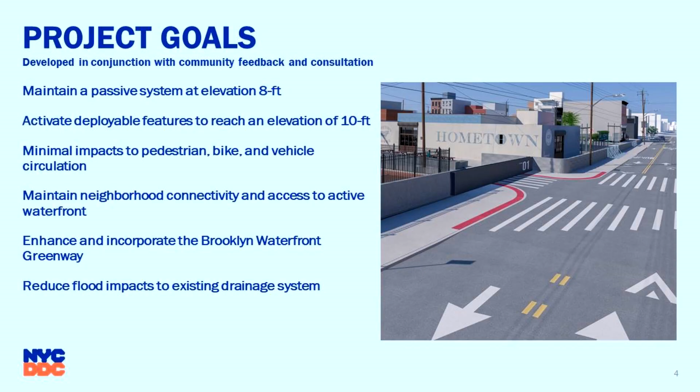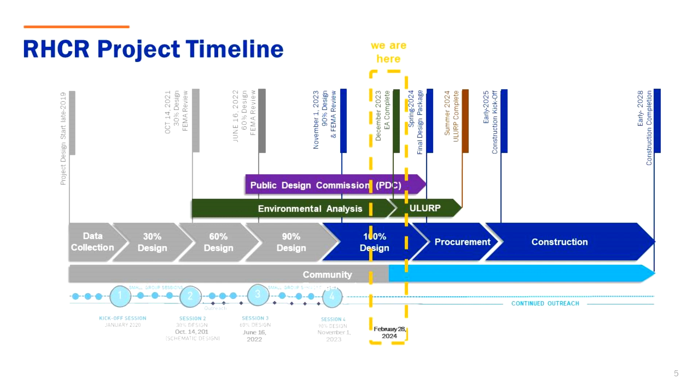So here is the schedule from top to bottom. PDC review and approval will be coordinated as we finalize design, and we're aiming for this spring. The public review of the EA is complete, and FEMA will address the comments received during the comment period. We are now in the ULURP process, which is what brings us here today, running through August of this year. Design completion is imminent, with about 100% design draft review beginning at the end of next month, or March. Community engagement has been and will continue to be a critical component of this entire process.

Now we'll take a look and review what we've heard recently about the project throughout design. This is a general overview of the community and stakeholder engagement to date for the project through design. Here are some questions and comments we've heard along the way; we'll be brief and hit some of the highlights.

There were concerns about the level of flood protection. Our design team went back to the drawing boards and developed a new flood protection system that protects the community to 99.9% of all historical storms at elevation 10. Public transportation requests helped inform improvements to the BWG, an alternative form of transportation. We ensured that flood protection is not just a stark wall, which was addressed in the design by incorporating elements like raising street grades, which act as a line of flood protection. Other comments about the BWG were addressed, and we also heard suggestions about specific sites in the area, but those are simply beyond the specific scope, aim, and goals of this project.

At 30% design, we heard the following regarding the alignment of flood protection, leaving some areas unprotected. A study was conducted to consider alternative alignments, but given the requirements of the FEMA grant, it was deemed infeasible to build flood protection elements outside of the city's right-of-way.

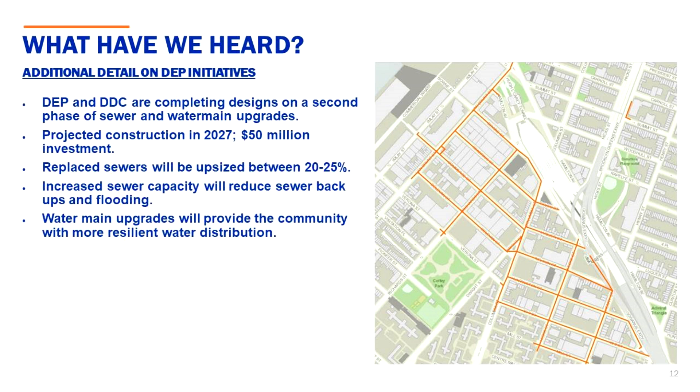Thank you, Eric. So I'm going to walk you through just 3 sections of the project. We're going to talk a little bit about existing conditions. We'll walk through the actual elements of the flood protection system, and then we'll talk a little bit about ULURP, what we're really here to focus on today.

All right, so just a little bit high level of the flood protection system. The system is made up of two independent systems.

The first system is the one we just highlighted along Atlantic Avenue. And the second system is along Beard Street at the bottom of your screen, which we have highlighted now.

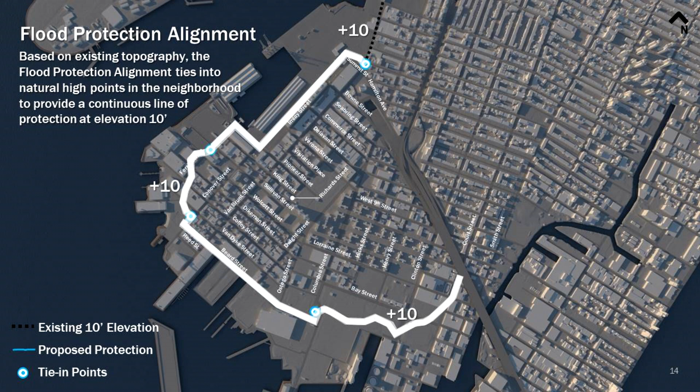Between those two systems there's an area where the existing grades are above elevation 10 currently, and the same thing happens on the east side of the project area. When all these pieces are linked together, you get a flood protection system that surrounds the entire neighborhood to elevation 10. That system is made up of both passive and active components, which we'll see in a second.

A little bit more about the existing conditions of the neighborhood. Generally, Red Hook is characterized by an industrial waterfront and has a residential core, with a band of mixed-use area between those two. The largest land ownership in Red Hook is actually by the Housing Authority, and about 70% of the residents of Red Hook live in the Red Hook houses.

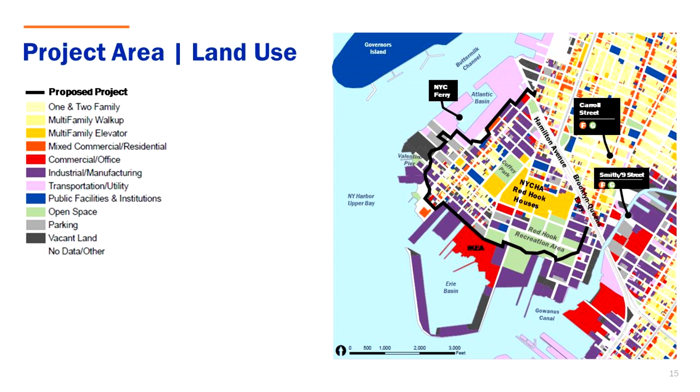There are a couple of notable exceptions to the general land use of the area. There is IKEA, which is along the waterfront, differing from the general industrial and manufacturing use there. It's also key to note that most of the waterfront, with a couple of key exceptions, is all private, so there's very little public area along it. That played a big part in our actual design alignments for the protection system. As Eric noted, everything had to be within the public right-of-way, and flood protection systems along the waterfront would not be.

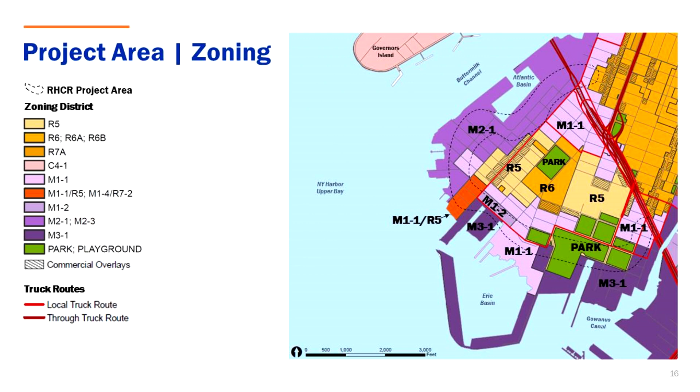A little bit more about the zoning of the area. You have manufacturing zones along the outside of the neighborhood, and the interior core, which is more residential. You'll notice also that there are truck routes that wrap through the neighborhood, noted by the dark red lines on the map. Those truck routes run down Van Brunt Street and around Beard Street, then out towards the east side of the properties.

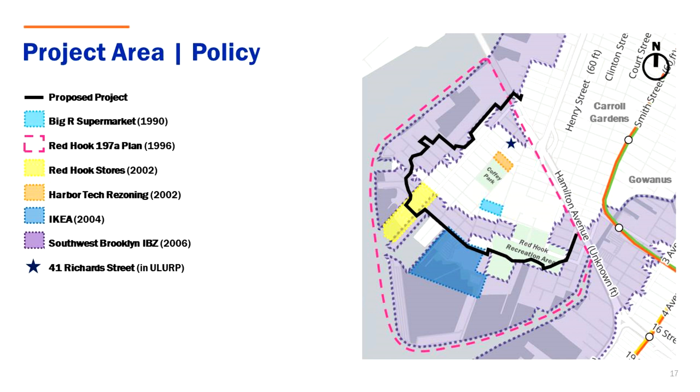Following the 197A plan, the Red Hook stores area was rezoned and remapped in 2002, and there was an additional rezoning for IKEA in 2004. The majority of the proposed project is located within the Southwest Brooklyn Industrial Business Zone, IBZ, which was established in 2006. The IBZ spans Red Hook's industrial waterfront and extends north to the Columbia Waterfront District and south to Sunset Park.

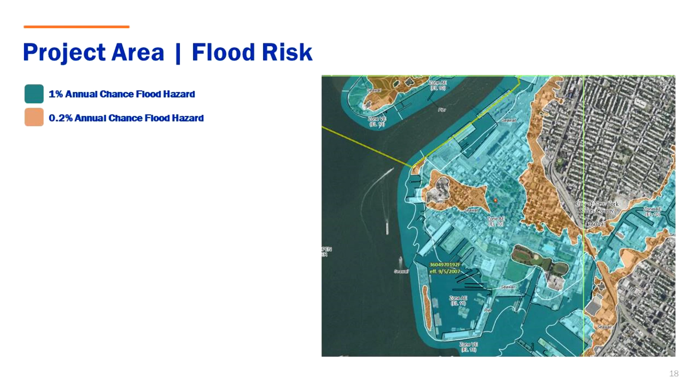You also note a couple of areas in orange here, which we talked about a few minutes ago. Those are the areas that are 10 feet and higher in elevation, the 500-year flood zones. That's what we use to tie our flood protection system into. So the natural topography really helped out with the flood protection system.

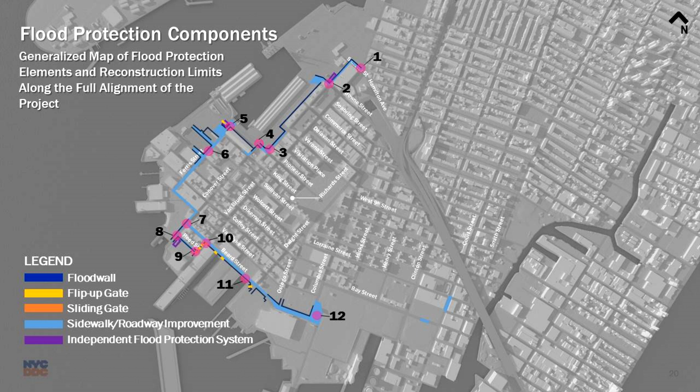All right, talking a little bit about the actual flood protection system itself. With an understanding of the difference between height and elevation, we are proposing a wall at an elevation of 10. But the highest wall within the neighborhood is about 4 feet high when measured off the sidewalk, so an elevation of 10 does not mean a wall that is 10 feet high.

The light blue throughout the corridor are streets that are being reconstructed and regraded. Some of these areas are being raised and others regraded to improve interior drainage. The dark blue line is the extent of the permanent concrete flood wall. The orange and yellow nodes are deployable gates that allow the system to achieve flood protection at a higher elevation, elevation 10. The purple areas are independent flood protection components around critical areas outside of the public right-of-way.

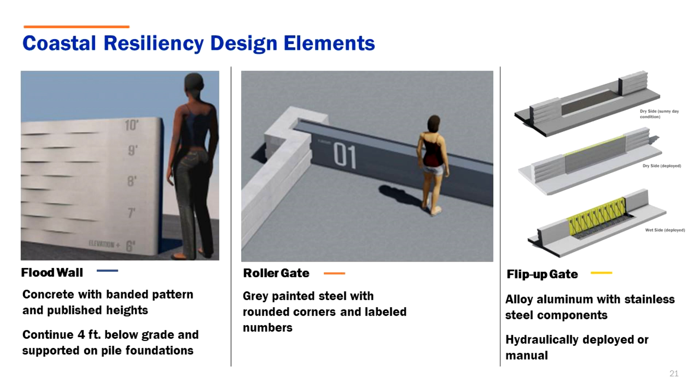And then finally, over on the right, you have flip-up gates, and those gates are flush with the sidewalk. You'll be able to walk in and out of the areas where those are located, and when required, they are flipped up into place. They also help complete the flood protection system at an elevation of 10. Without some of these movable components, we still have a flood protection system at elevation 8.

So a little bit now about environmental review and the land use actions, and kind of what we're here to talk about tonight. An EA was completed for this project following the FEMA format and meeting all the requirements of the city's CEQR and state SEQR system. A current final draft FEMA EA was published on FEMA's website in January of 2024.

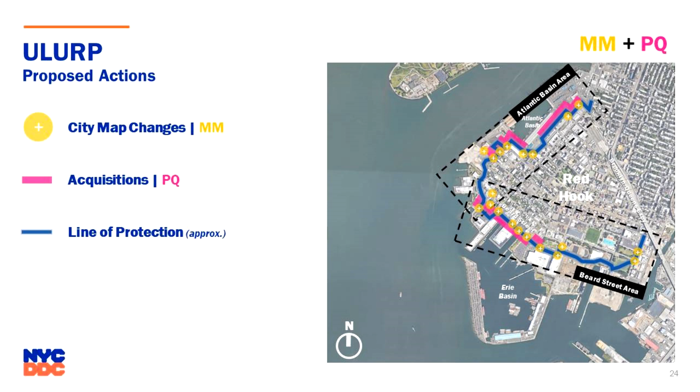The official review period kicked off with the public notice on January 26th, and the comment period will end 30 days after that publication, which was a few days ago on February 25th.

In addition to the EA process, which is separate from the ULURP process that we're here to talk about tonight, the EA is essentially complete now, and we've submitted our joint application to the Department of City Planning on behalf of the 4 city agencies for the ULURP process to start. That's the New York City Department of Design and Construction, Department of Transportation, Citywide Administrative Services, and Parks and Recreation.

That application is for changes to the city map and acquisitions to facilitate construction, operation, and maintenance of the Red Hook Coastal Resiliency Flood Protection System. This map is kind of an overview of all the actions. We're going to have a couple of maps here that break this down in a little more detail.

All right, so first thing we'll talk about is the street grade changes. There are a number of proposed changes in the existing city map highlighted on this plan in yellow. Changes to the legal street grades are noted here as well, and those are the circles that you see around the maps with the plus signs in the middle of them. And then we have actual changes to the map themselves.

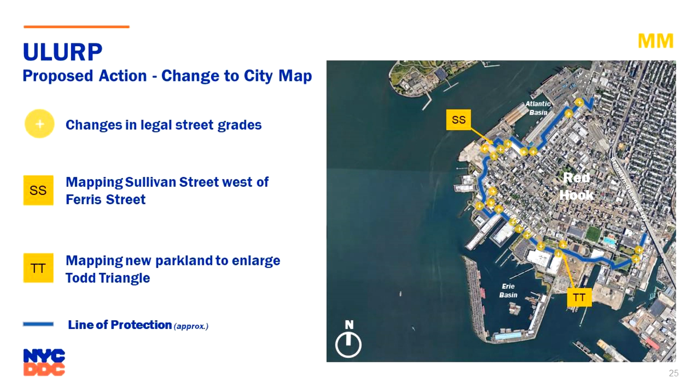So these are mapping exercises on Sullivan Street, west of Ferris Street. That's one that's identified as SS. And then you also have a mapping of the park land next to Todd Triangle, and that one is marked as TT.

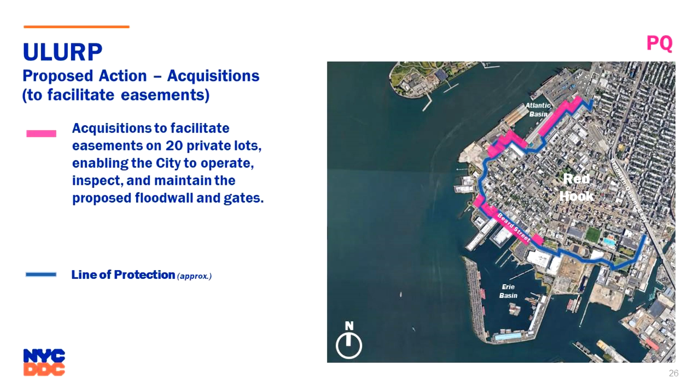So these actions here are the areas where we're facilitating the project by acquisition, or acquisition of easements, as it's identified here. To facilitate the easements, city planning refers to these as acquisitions. There are 20 private lots along the route where we need to acquire an easement, and those easements are generally for maintenance of the flood protection system, the gates, and the movable barriers. It's not real acquisition of property, it's acquisition of an easement to maintain and inspect that property in consideration of the FEMA requirements for the flood protection system.

This is a more detailed map of all the ULURP actions. We've broken this up, so this is the first half of the project, the Atlantic Basin area.

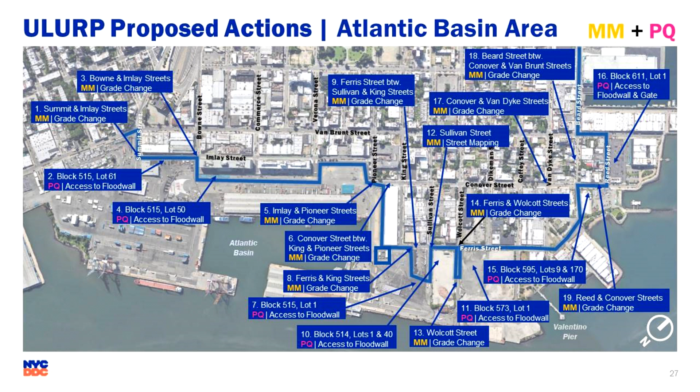If you don't get all this information now, these presentations will all be made available, so you'll be able to look through these things in detail. On this map, you're seeing both the map changes or grade changes to the map, as well

I'm going to back up one more time - the dark blue line that runs through all these maps is the generalized alignment of the flood protection system. It gives you an idea of where the flood protection system is and where those map changes or acquisitions are also required.

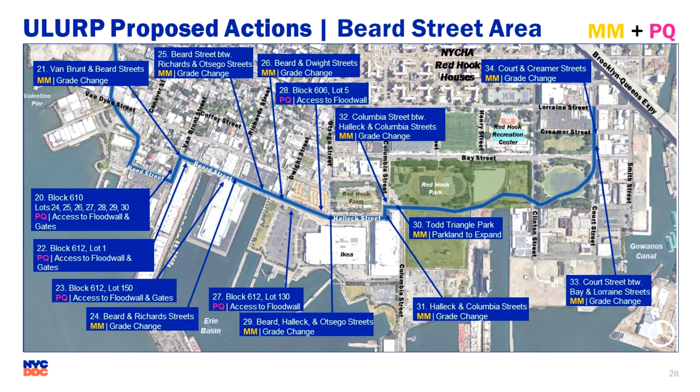Next steps in this process - this is more of a summary and next steps at the same time. We have this passive system at elevation 8 that we've developed, and with those active deployable features, the gates and the roller gates and the flip-up gates, we end up with a level of protection at elevation 10.

So the system of flood walls, raised street grades, deployable floodgates, and supporting infrastructure all work together with the existing topography at the high points that we noted at the beginning of this presentation, which allows us to minimize the built infrastructure and tie into the existing topography.

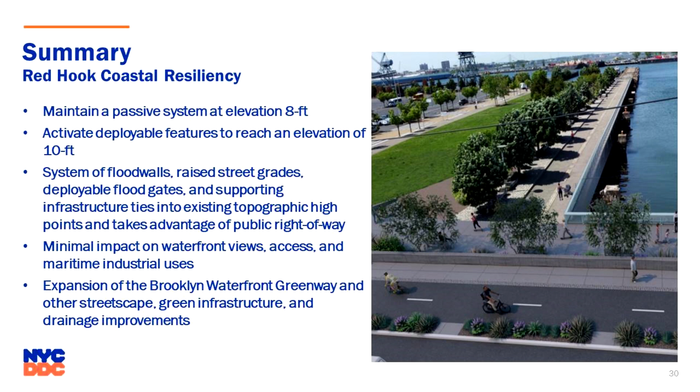The project also has a number of amenities associated with it, like the Brooklyn Waterfront Greenway, Todd Triangle, the incorporation of best management practices and green infrastructure throughout the route, and a number of other amenities as part of the overall project.

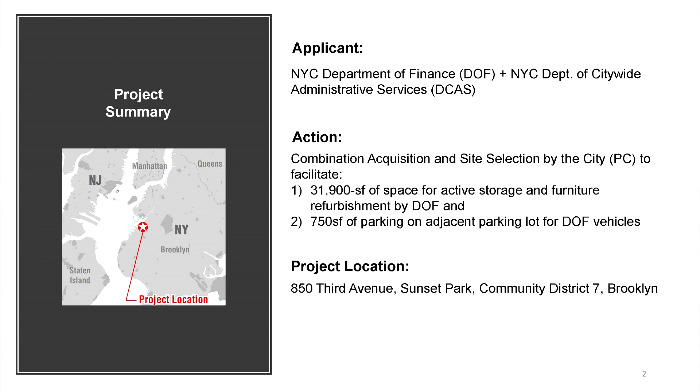This is an application for a site selection and acquisition action jointly sought by DOF and DCAS to facilitate approximately 31,900 square feet of space for DOF related to active storage and furniture refurbishment, as well as 750 square feet of space on the adjacent parking lot at 850 3rd Avenue in the Sunset Park neighborhood of Brooklyn, Community District 7. The project site is located at 850 3rd Avenue and is bounded by 2nd Avenue to the west, 3rd Avenue and the elevated Gowanus Expressway to the east, 30th Street to the north, and 32nd Street to the south.

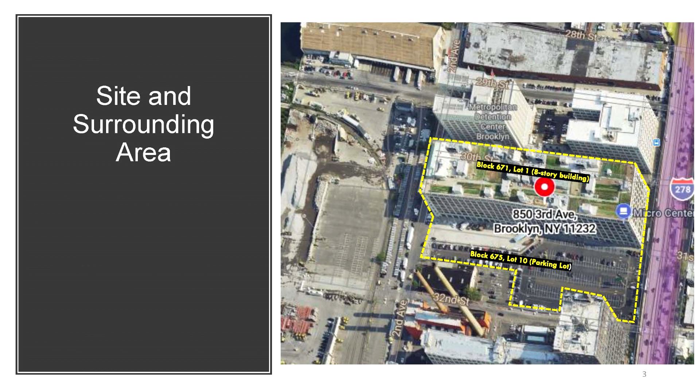Block 671, Lot 1 contains an 8-story building known as Liberty Brooklyn with approximately 1.13 million square feet of floor area, including light manufacturing, retail, and commercial office space uses. Block 673, Lot 10 contains the building's adjacent surface parking lot, which is used by visitors.

DOF records contain personal and confidential information that must be maintained in accordance with Internal Revenue Service, IRS, high security protocols. In 2014, IRS publication 1075 provided new regulations regarding the storage of sensitive information. As a result of these new regulations, it was imperative that DOF obtain secure file storage with 24-hour, 7-day-a-week self-service access for DOF employees. DOF currently maintains 2 operational storage facilities in the Sunset Park neighborhood of Brooklyn.

As part of the recent lease negotiations at the Industry City location, the landlord requested that DOF reduce its footprint, which led to the consolidation and relocation of storage space to the 5th floor of the 850 3rd Avenue site through the short-term license agreement currently in place. This application will permit the short-term license agreement at 850 3rd Avenue to become a long-term lease.

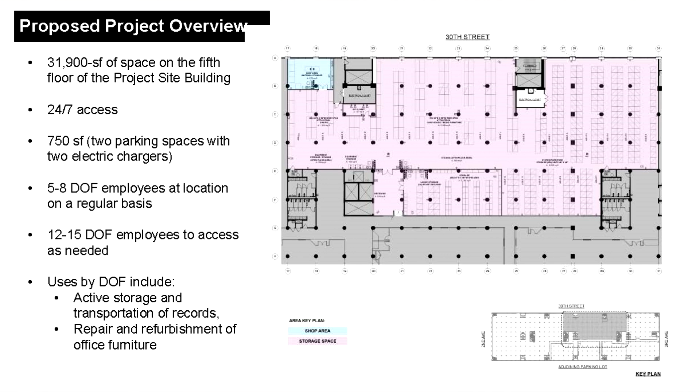The space would be accessible 24 hours a day, 7 days a week. However, typical hours of operation would be Monday through Friday during business hours, and no employees would be anticipated in the space on weekends. DOF employees would be permitted to use a dedicated loading dock and elevator to access the storage space.

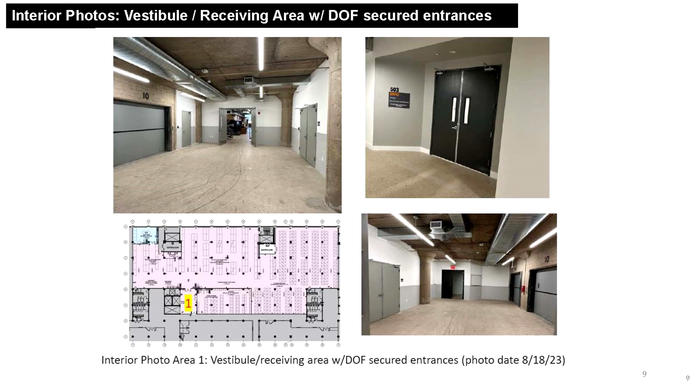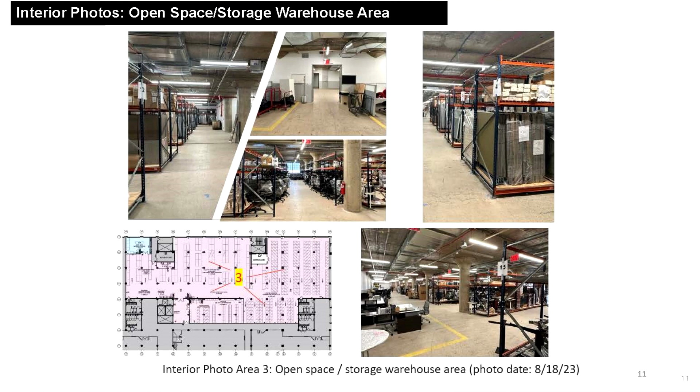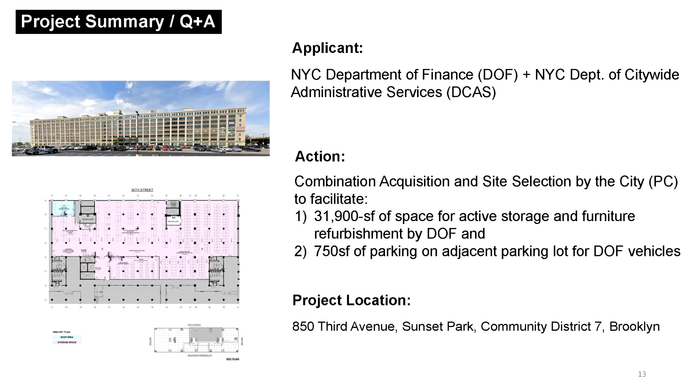What other sites were evaluated for locating this facility? I'll turn that over to John.

I'm John Kosa, Director of Leasing at DCAS. I've been involved in this project, not from the beginning, because it's gone on for quite a few years, but I'm involved now. The project was started in a pre-COVID, much different real estate market. We looked at a number of sites. We hired a tenant rep, Cushman & Wakefield, to do a site survey. We've looked at at least 6 or 8 sites, which I can list here: 4312 2nd Avenue in Brooklyn, 3913 2nd Avenue in Brooklyn, 105 Evergreen Avenue Brooklyn, 1450 3rd Street Brooklyn, 6626 Metropolitan Avenue in Queens, and 3353 Flatbush. There may have been a couple of other sites. So there we go, thank you.

And I know you mentioned this briefly in the presentation, but can you reiterate how many jobs are estimated to be located on site? Our environmental assessment statement assessed up to 20, but no group would be there on a permanent full-time basis. It would be just to load and unload and for some of the furniture refurbishment activities.